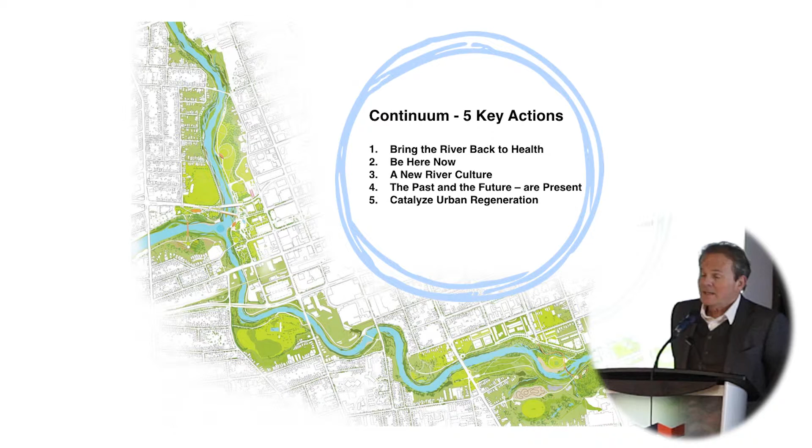The continuum is founded on five key actions. Bring the river back to health restores the river's sustainability and ecology. Be Here Now captures the myriad of activities that will bring Londoners back to the river. A new river culture advocates for an emerging generation of river stewards through participation, education, and culture.

The past and the future are present. This is the last line from Joseph Boyden's Orenda. For us, it asks the question: can the deep history of the river valley be better revealed through indigenous placemaking? We believe it can.

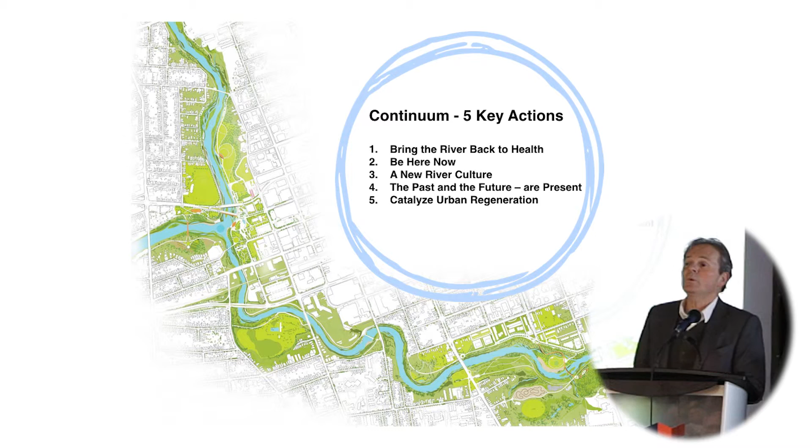The fifth action, catalyzing urban regeneration, provides a strategy that pairs river improvements with urban redevelopment to leverage funding for these initiatives from other levels of government and the private sector.

So now to begin, reviving the river's health will bring us back to the river. A series of environmentally restorative measures are proposed to revitalize the watercourse and the valley lands.

Today, the river channel is overly wide and shallow given the volume and speed of water moving through it. These are not healthy river conditions. By strategically narrowing the river, it will move faster with deeper pools, creating better conditions for sediment transport and the creation of healthy habitats.

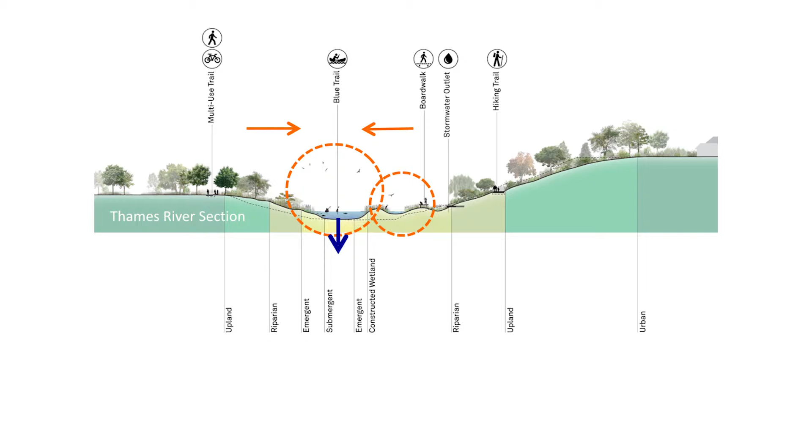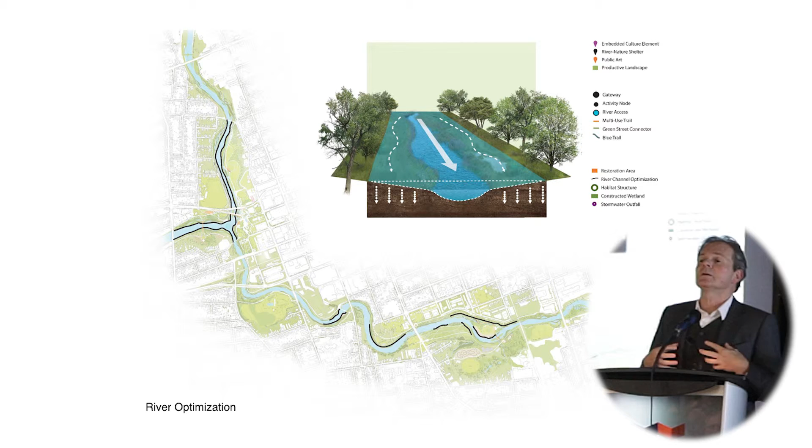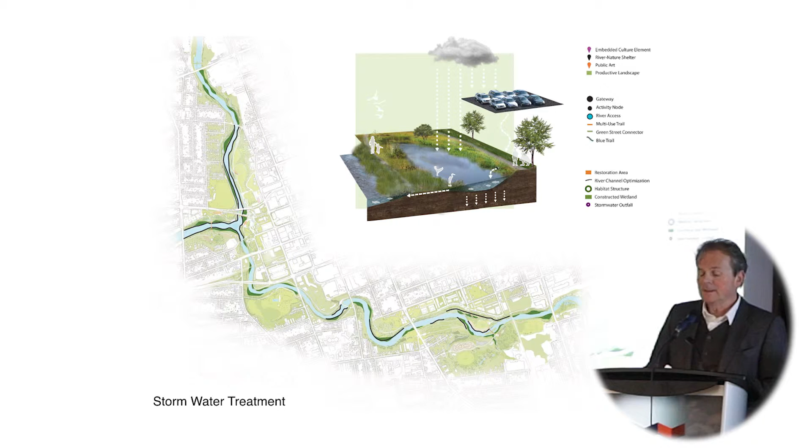By shifting the riverbanks inward, wider areas containing wetlands, parallel water channels, and new trails can be created on both sides of the river. Constructed wetlands are located at stormwater outfalls coming from the surrounding urban area, naturally filtering and cleansing the water before it enters the river.

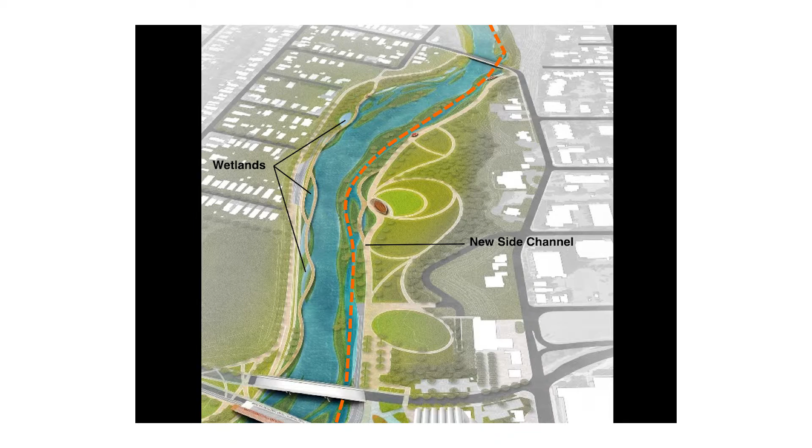Side channels and wetlands line the reconstructed riverbanks, creating space for new river activities, including winter skating.

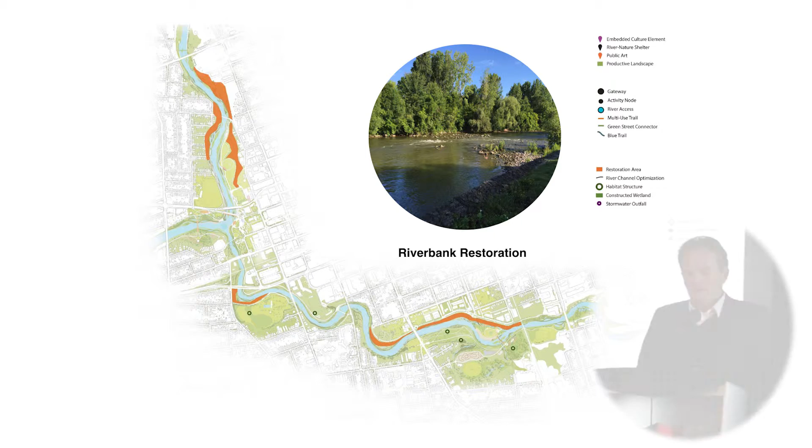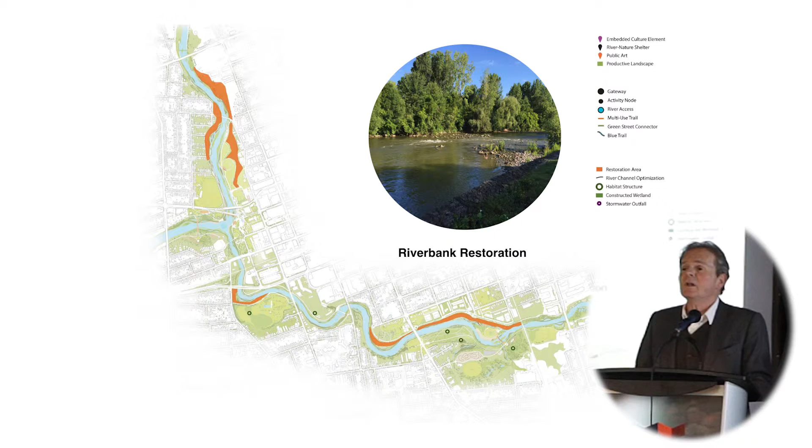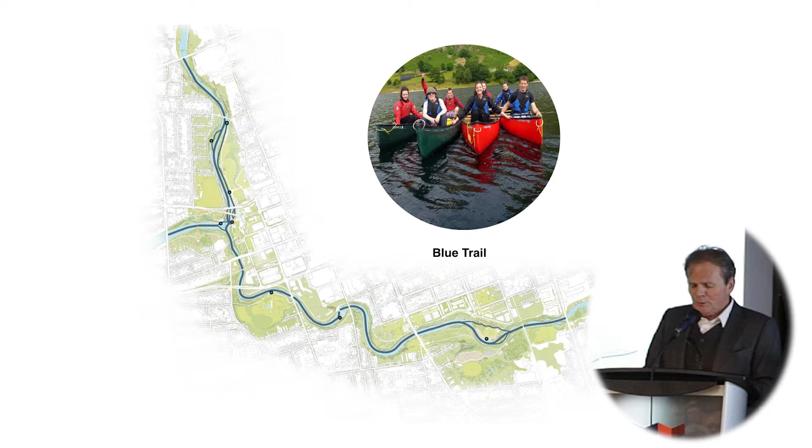Areas of degradation through the valley are restored through regrading and replanting, improving terrestrial habitat while consolidating green corridors for wildlife. A blue trail for boating spans the river, connecting to a series of launch points which also serve as interpretive sites. An enhanced green trail system provides a continuous circuit for hiking and jogging.

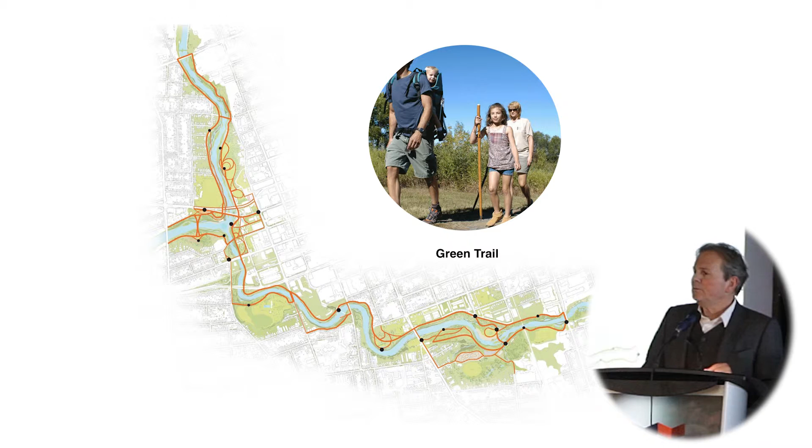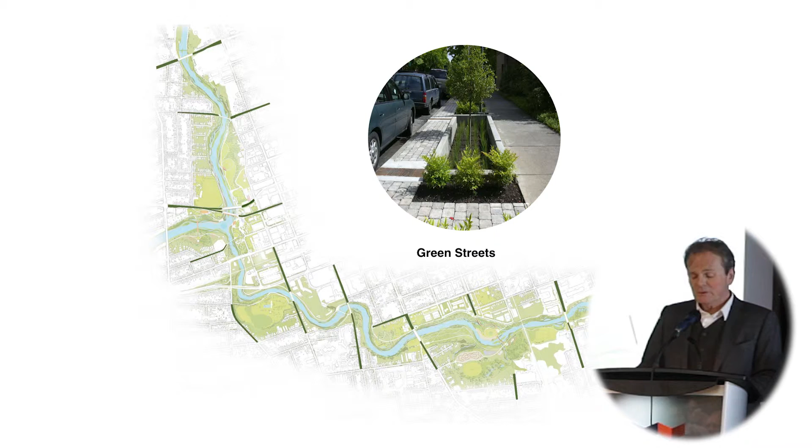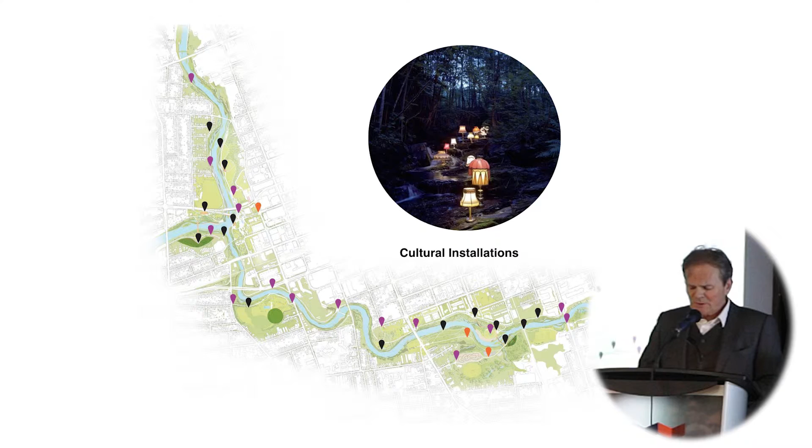Green streets and gateways provide a unique, sustainably branded design that draws people in the surrounding neighborhoods to the river, and a network of shelters and installations accommodate exercise stations, interpretive signage, public art, and educational installations.

We are proposing a sequence of 15 river nature shelters, placed along the river pathway network, accommodating a new program of outdoor education for kids and all those who will become the stewards of the river. These shelters also provide seating, shade, and other public amenities.

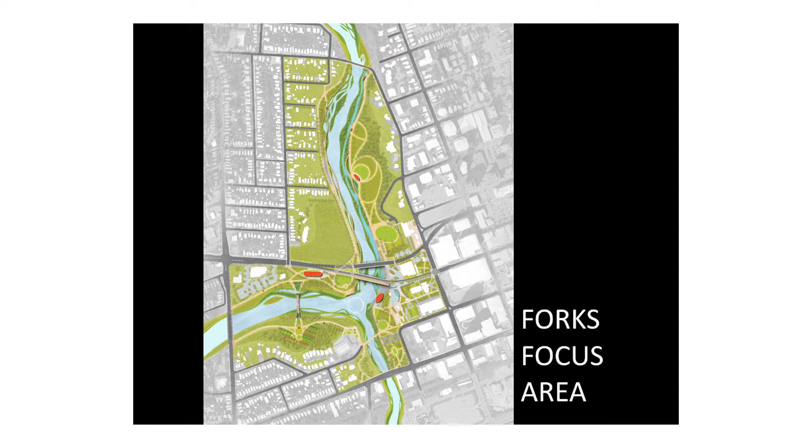So, moving now to the first focus area. At the heart of the Forks, a new circuit path is proposed as a continuous pedestrian loop linking the three banks of the river to a series of destinations and activities.

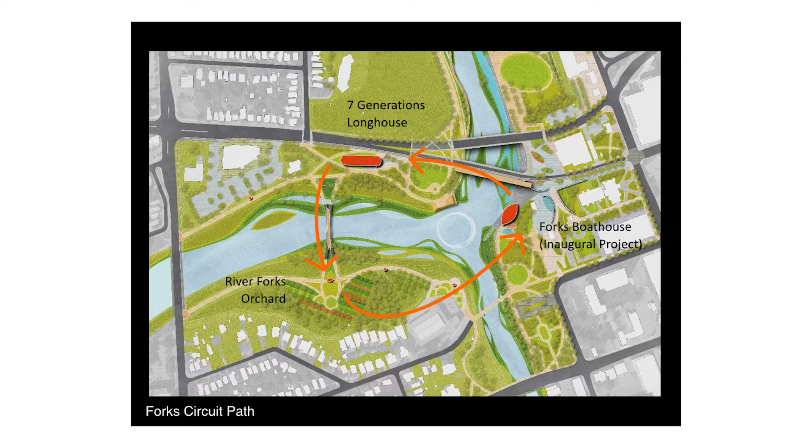The circuit is achieved through new bridge infrastructure, including a cantilevered pedestrian promenade on the Kensington Bridge and a new suspension bridge we call the Antler Bridge.

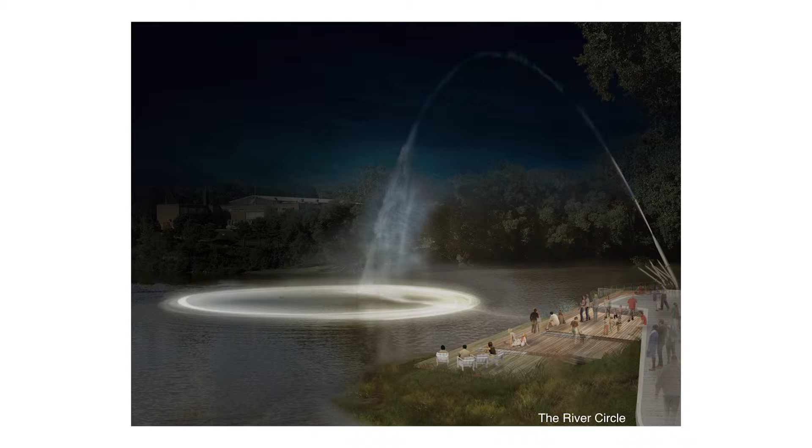At the epicenter of this circuit, marking the confluence of the merging watercourse, the river circle is the visual and symbolic anchor of the Forks. This circle is created by placing aeration loops on the riverbed, which oxygenate the water. Air bubbles rise to the surface in shifting patterns that glow during the day and night.

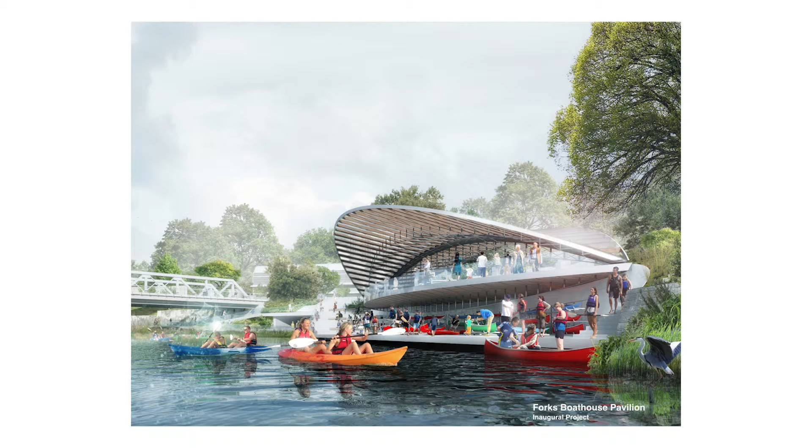And now I will hand it over to John to present the Forks inaugural project. Thank you, Cal. The Boathouse Pavilion draws the public back to the river by creating a multi-purpose venue for gathering and relaxation, for performance and learning, for events, and for embarking on river adventures.

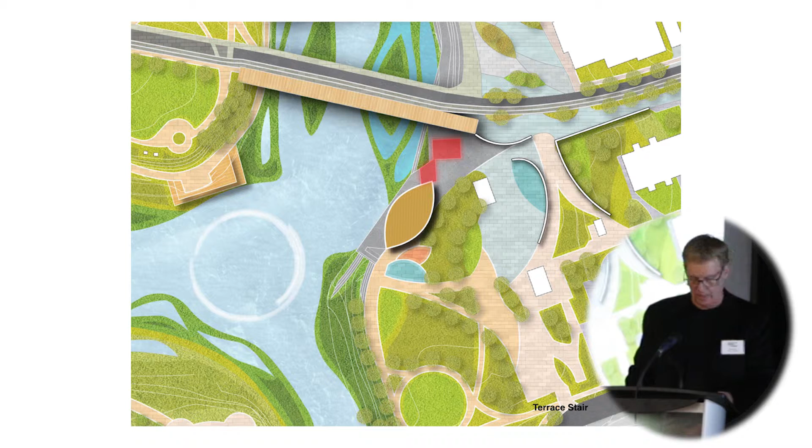Three main components of the boathouse anchor Dundas Street, reconnecting and reinvigorating the river's edge with a new public amenity: the terrace stair is the first, the floating boat deck is the second, and the overlook pavilion is the third.

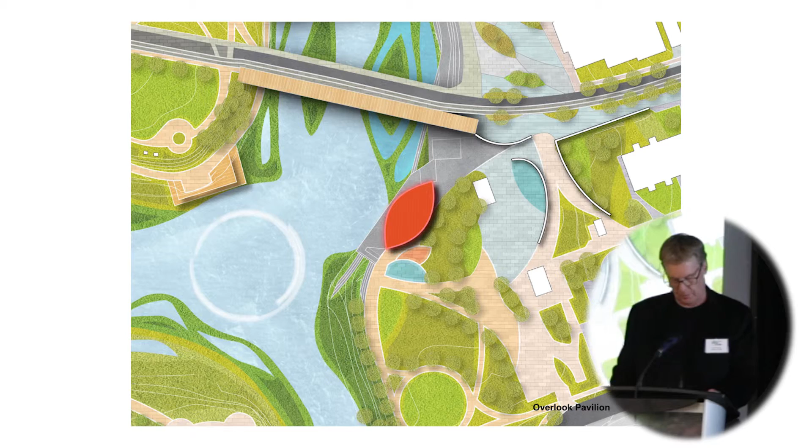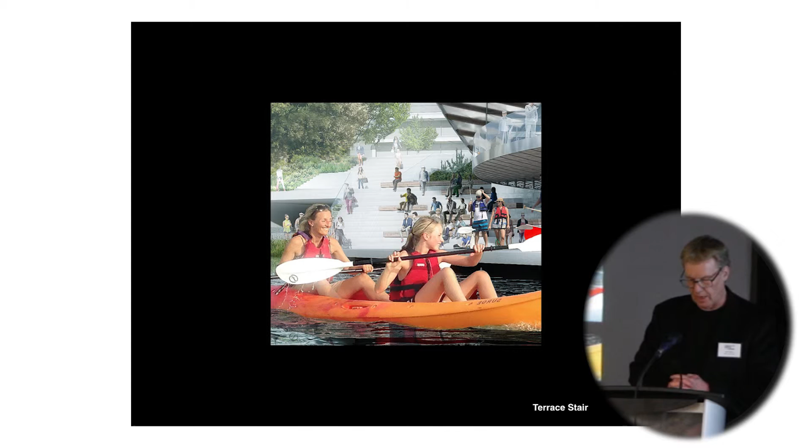The terrace stair connects Dundas Street to the floating boat deck and is a natural place for education and instruction. During lunch hour and weekends, it can become a new social hub along the water, drawing the public from street level down. It is also a natural place, day or night, for hosting performance and entertainment events.

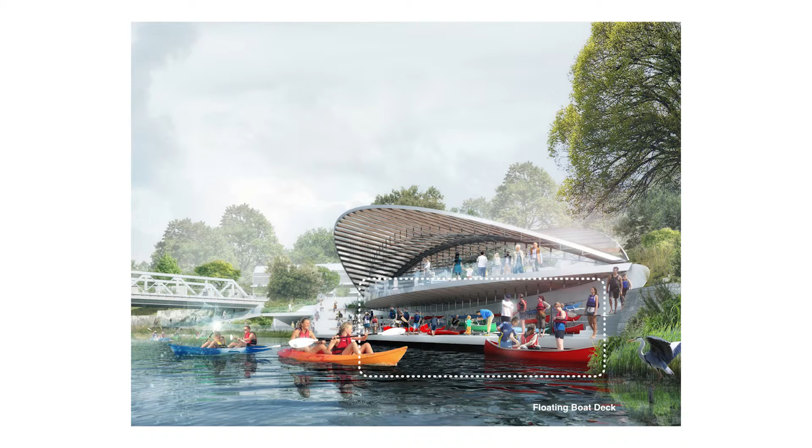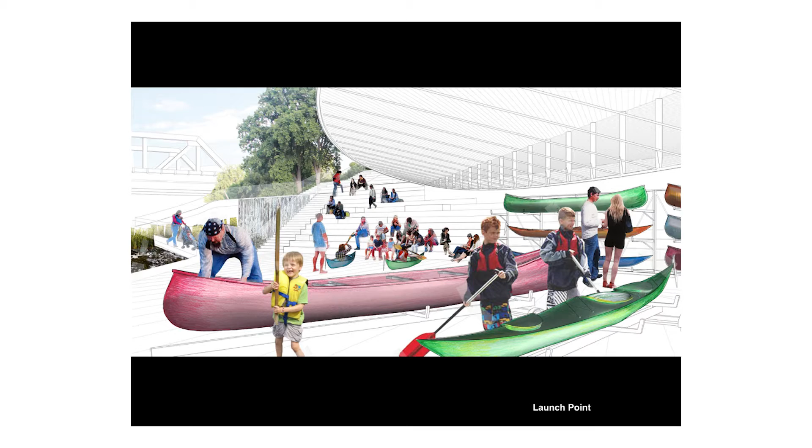The floating boat deck, sheltered by a robust concrete or cross-laminated timber slab and cable truss system, provides a launch point for river access, a venue for demonstration of boating techniques and water safety, alongside talks about the historical and ecological heritage of the Thames River. It is also a place where the public can rent a variety of small craft and head out onto the river for a day of active fun or relaxation.

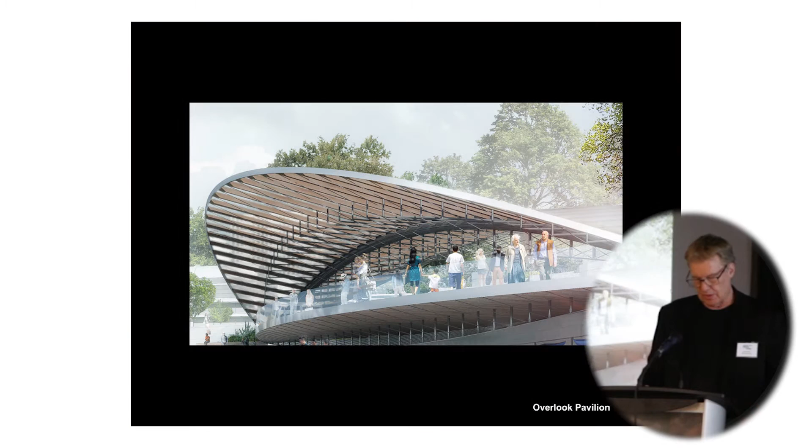The Overlook Pavilion, constructed of a filigree of wood, steel, and glass, creates a shaded place for large groups—perhaps not as large as the Table for 1200 fundraiser in Winnipeg, but a wonderful place for many events, including a bustling venue for weekend craft markets, or a quiet place for contemplation.

Moving from the boathouse, one now crosses the Kensington Bridge via the expanded promenade deck that provides space for overlook and can be programmed for special festivals and events.

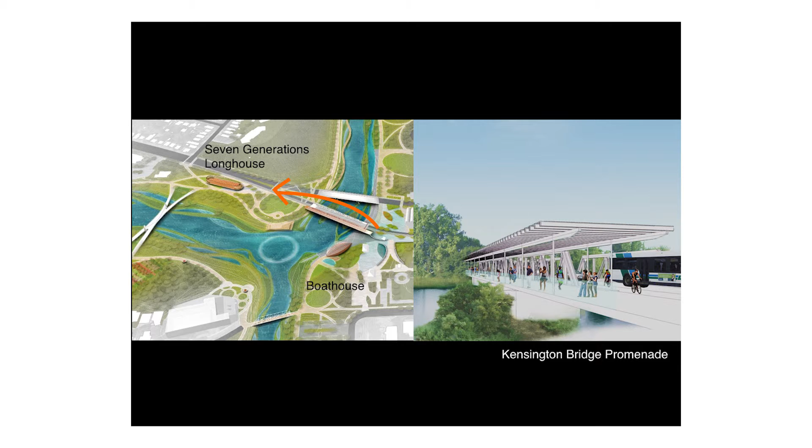The bridge metaphorically links London's multiple histories and cultures, leading us to the 7 Generations Longhouse.

There is little in the physical fabric of London that reveals the presence of the ancient First Nation cultures that have settled on the riverbanks for millennia. The 7 Generations Longhouse is one first step to address this missing link using ancient bentwood fabrication techniques. This outdoor pavilion will be a space for learning and vibrant cultural events. There is momentum in this time and era for reconciliation on both environmental and cultural levels.

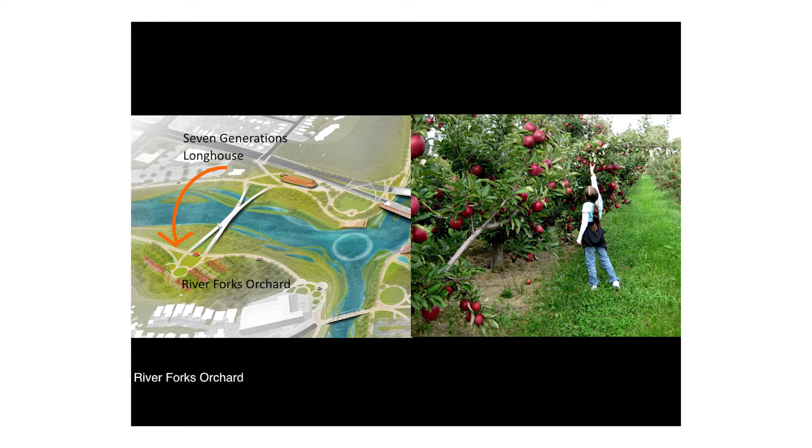Across the Antler Bridge, a new orchard builds upon the existing community garden at River Forks Park, expanding the river's role as a place of urban agriculture.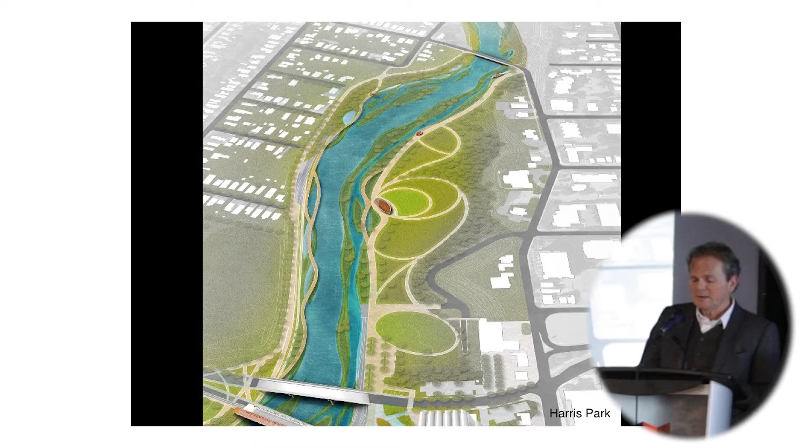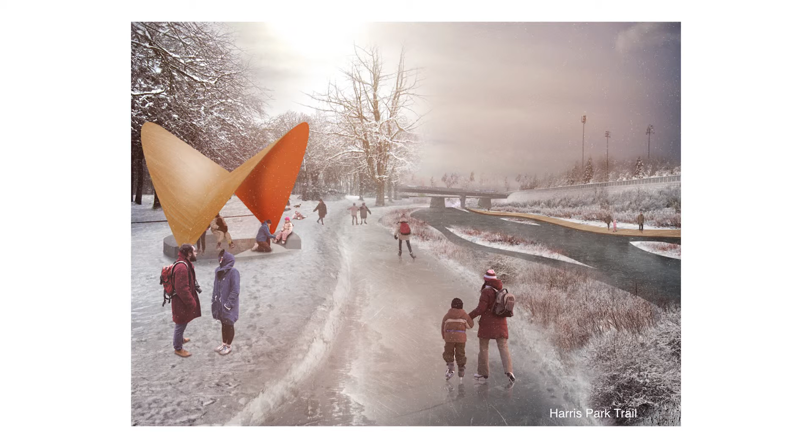To the north, Harris Park is revitalized through river restoration with new wetlands, channels, and native planting. Its role as a space for recreation, music, and cultural festivals will be strengthened. The land is sculpted to provide a natural amphitheater with a new band shell positioned to face both the amphitheater and the river. In the evening, a program of curated public art is projected onto the retaining wall on the west side. Harris Park will become a revitalized community destination year-round.

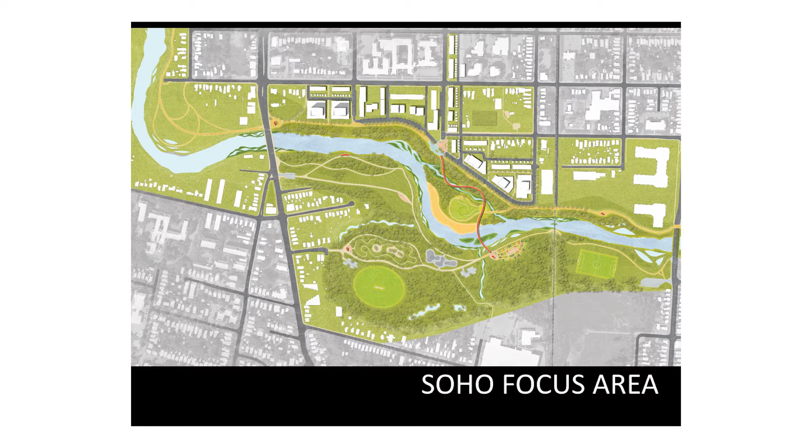Now on to Soho. The vision for the Soho focus area provides an exciting range of activities aimed to draw people from the surrounding neighborhoods to the valley on a daily basis. John will introduce you to the Soho neighborhood inaugural project.

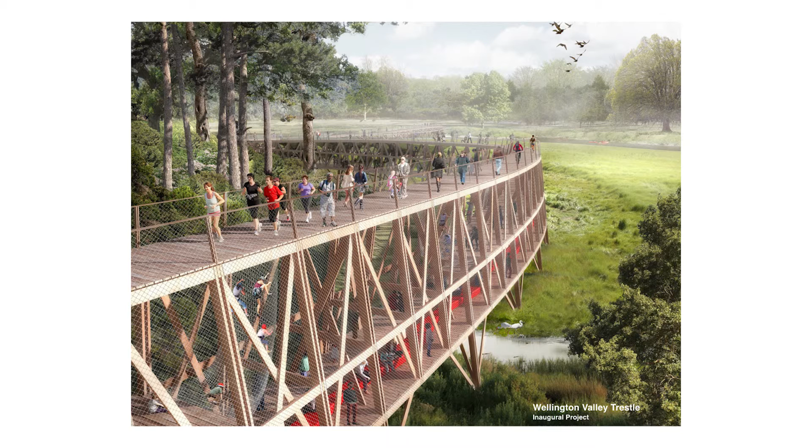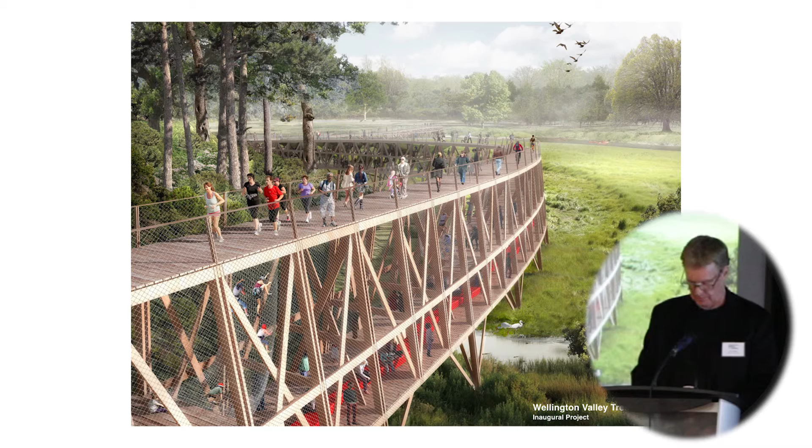The Wellington Valley Trestle weaves together the urban and the wild by connecting the Soho neighborhood to the forest embankment and the wetland floodplain below, with a gently sloping elevated pedestrian walkway that is also an armature for a variety of public spaces and events. Inspired by the robust wooden trestle bridges of our railroad history, the trestle navigates steep and impassable terrain.

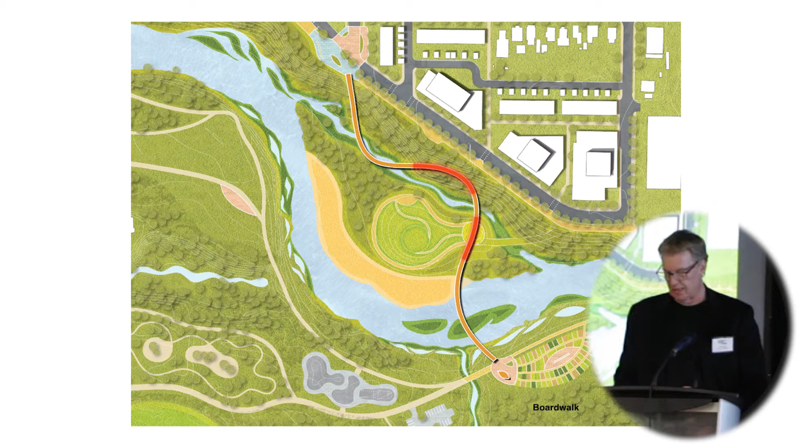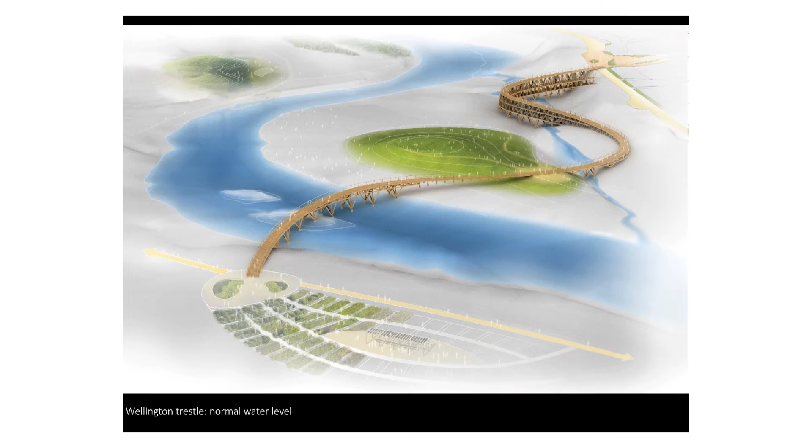Where possible, the trestle touches down on the river valley as an undulating, elevated pedestrian boardwalk. This range in scale provides a variety of advantages, from the panoramic to the personal. The trestle is designed to function in normal conditions, and it also functions during periodic flood events.

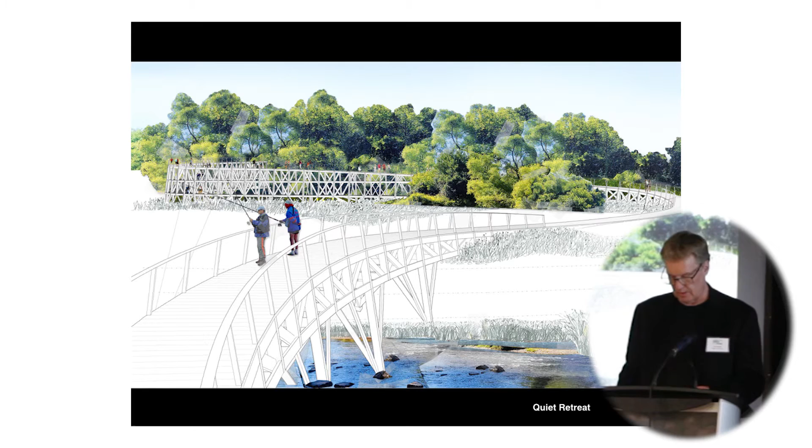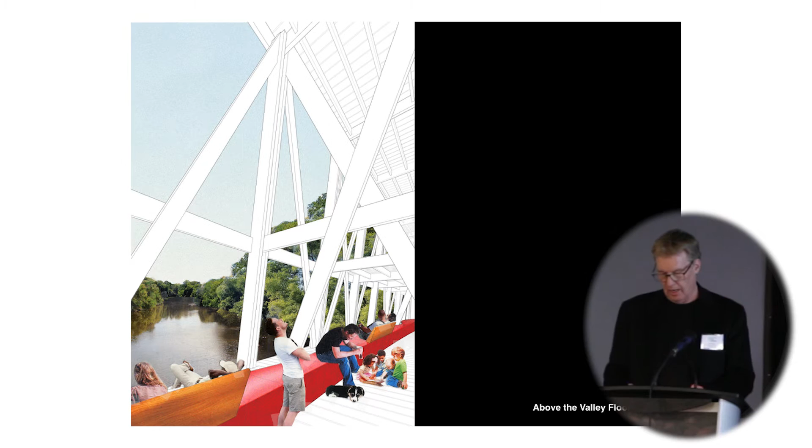The gently sloping trestle deck acts as a sinuous circulation route and view platform, accessible to all, from athletes to families with strollers. But it can also provide a quiet retreat not far from the bustle of city life. A public porch is housed within the trestle structure, providing the public with a large gathering area to socialize and relax, a new outdoor room suspended above the valley floor.

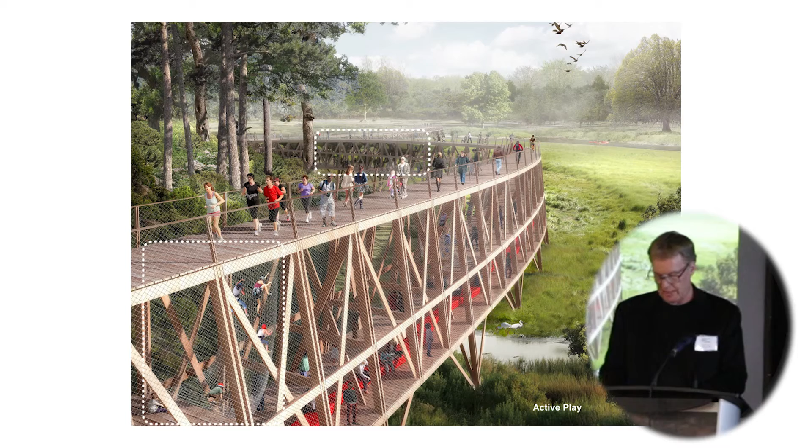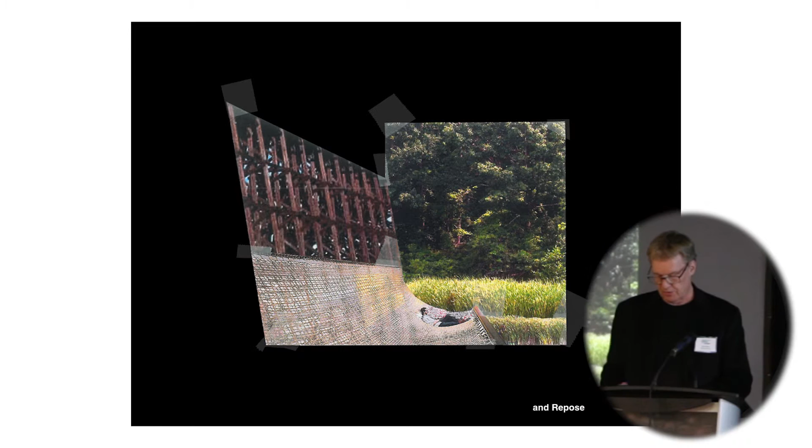The trestle also provides an opportunity to play, with active zones for rappelling, zones spanned by durable climbing nets. These nets are inspired by the art piece Nets by Numen, and also areas for repose. Pathway, viewing platform, public porch, outdoor room, active play structure, and place of repose.

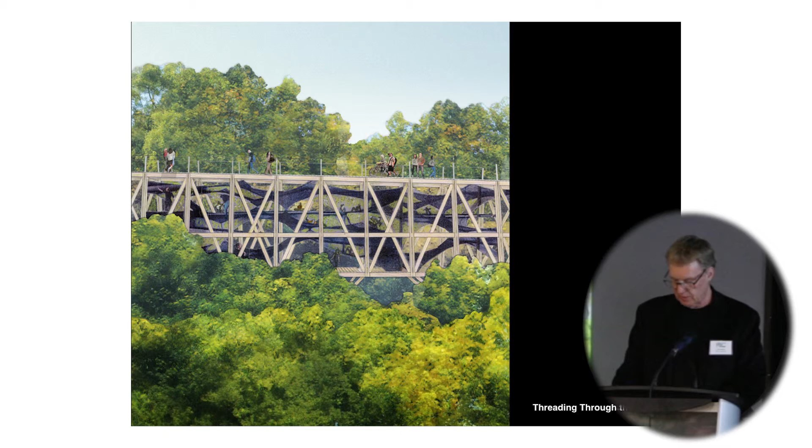The Wellington Valley Trestle is a thread that connects the Soho neighborhood to and through the river valley below.

Get all this stuff out of your way.

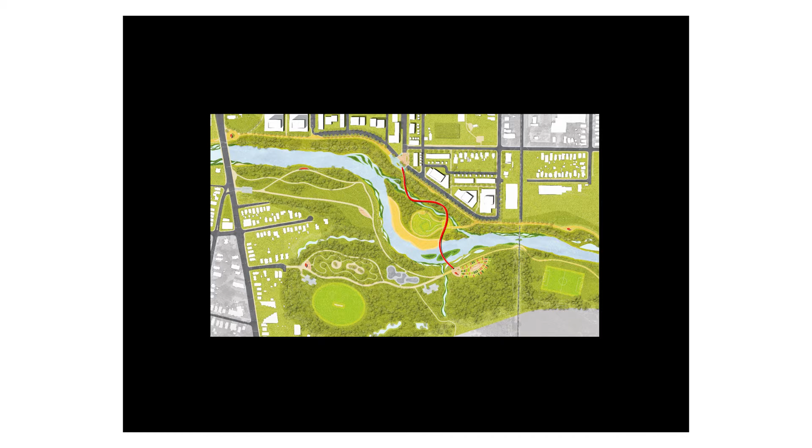The Wellington Valley Trestle is a sinuous spine that links the city to the river and the surrounding neighborhoods to an eclectic array of activities that bring us back to the river. The trestle connects to a pathway system on both the north and south banks, linking multiple activity areas.

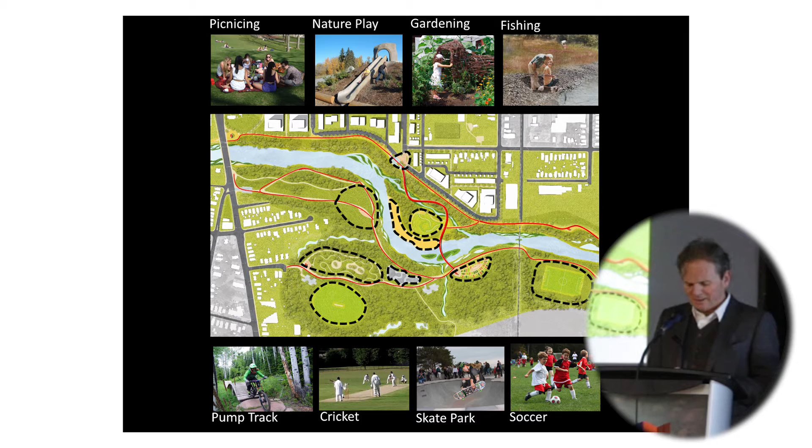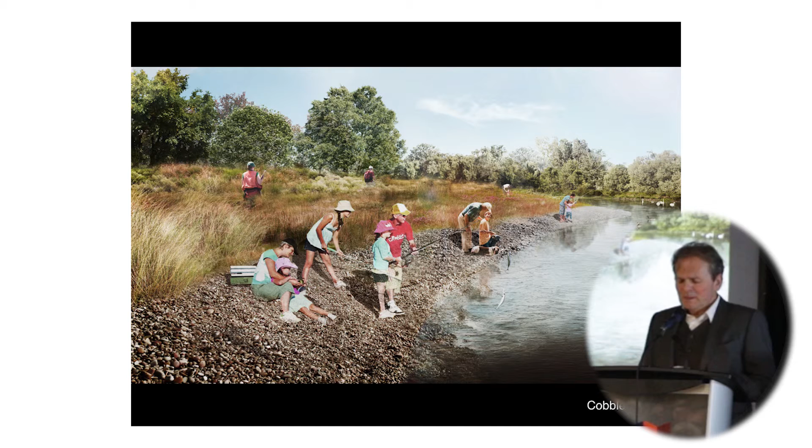On the north bank, a new channel flows through the Wellington Heath at the base of the steep embankment. Two key activity areas include the Nature Adventure Playground, located centrally in this naturalized landscape, inviting exploration and discovery, and the Wellington Heath Cobble Beach, bringing families to the river's edge for fishing and picnicking.

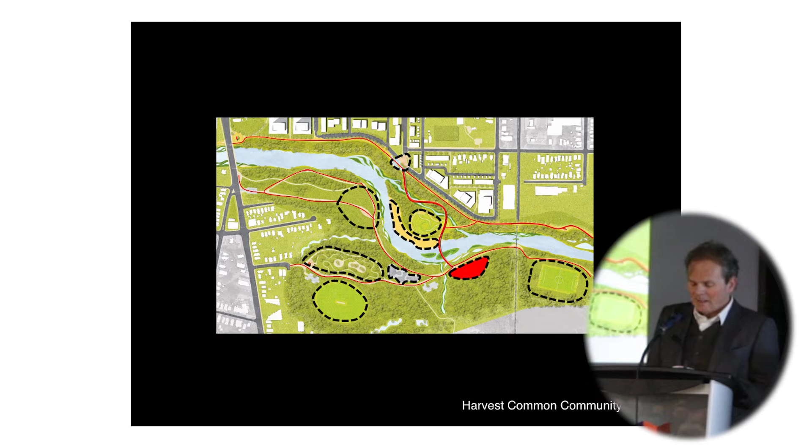Crossing the river now, at the south end of the trestle, a neighborhood base for community gardening is created at the Harvest Common, a place of gathering that reaffirms the river's role in local food production.

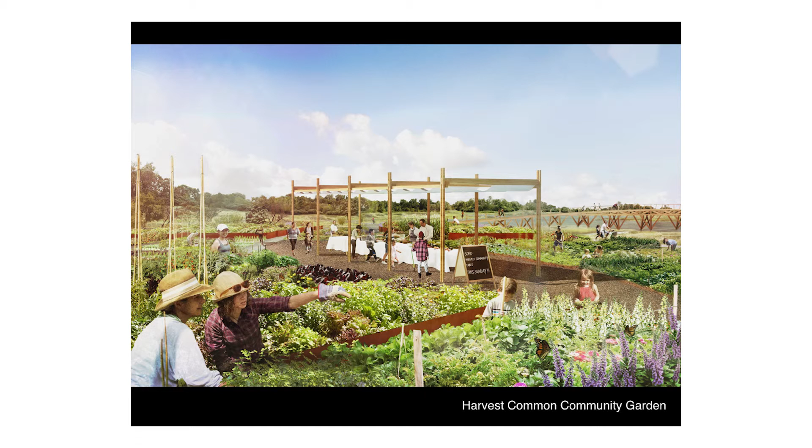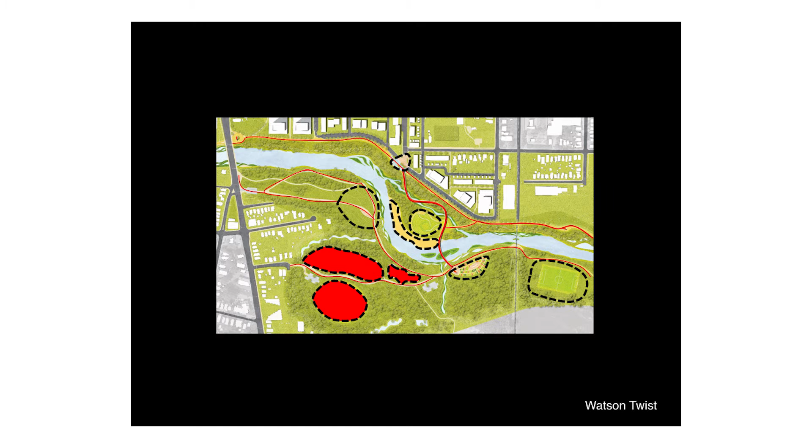Further along the trail, improvements and reprogramming of Watson Park focus on providing youth with an exhilarating series of activities. This eclectic vision we call the Watson Twist, with a BMX pump track course and skateboard park mixed inconceivably with cricket.

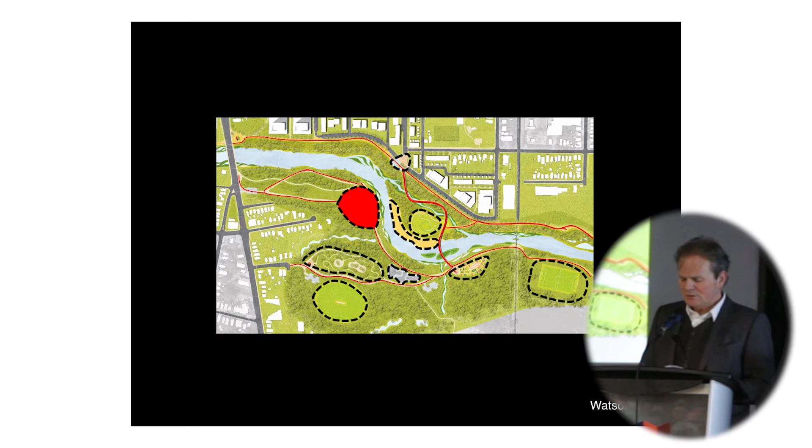On the south bank of the river, the Watson Bowl is central to a more serene and passive experience, where kayakers, canoeists, and hikers will be immersed in a beautiful natural landscape.

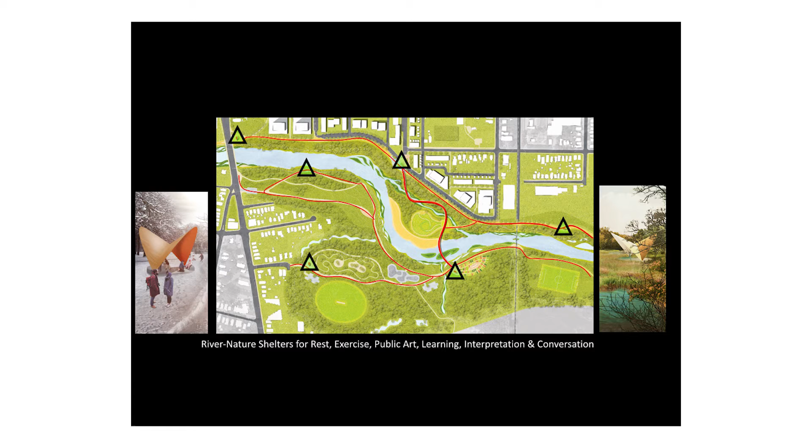Modulating this network of trails and events, 6 of the 15 river nature shelters are located within the Soho focus area. They serve as gateways, places for meeting, for resting, for learning, and conversation. As these gateways touch the surrounding neighborhoods, they can become places of interest, hosting a program of curated public art.

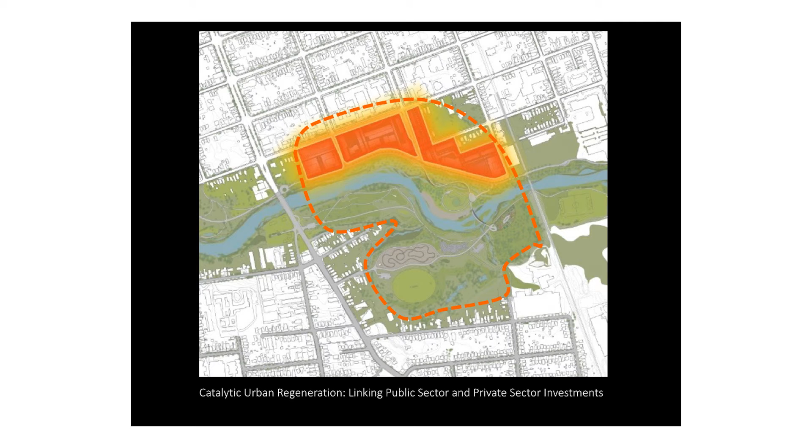Soho provides a perfect example of how the city's investment in the river can trigger urban regeneration by linking river improvement areas with adjacent urban sites. A strategy of public-private investment can be established, increasing the city's tax base and leveraging funding from other levels of government for river valley revitalization.

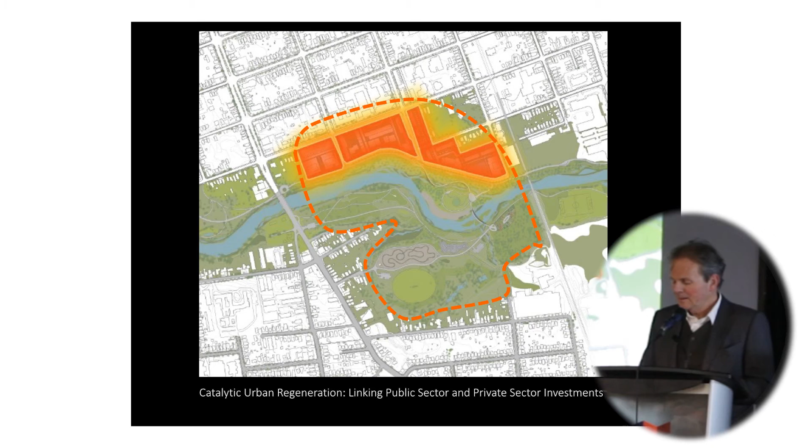This strategy is amplified to capture the entire Back to the River corridor, incorporating 5 regeneration precincts. Collectively, these sites represent 21 hectares of urban land that can result in millions of square meters of mixed-use development, triggered by the incredible quality of life that the river will present.

These numbers represent the type of catalytic effect experienced by other Canadian cities as a result of public sector investments in waterfront. The direct and indirect economic impacts far outweigh the cost to build, maintain, and operate these revitalized river lands, underscoring both the financial viability of the project and its soundness as a strategic public investment.

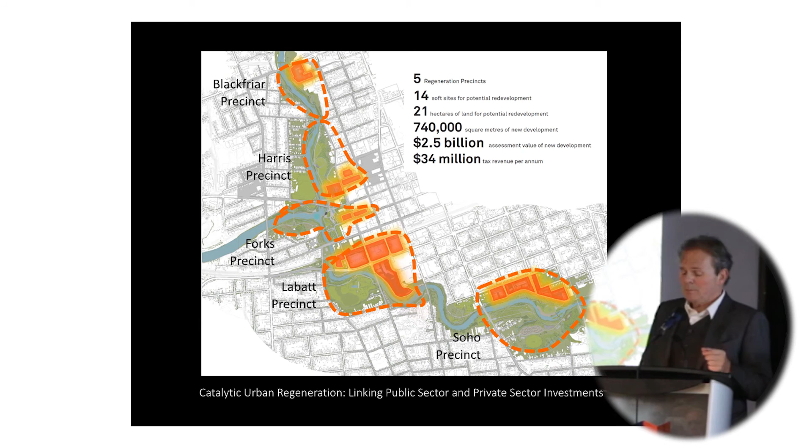In conclusion, a revitalized, sustainable river valley that brings Londoners back to the Thames is great economics, but it's also good for the soul of this community. These initiatives will ignite a pride of place whose value is hard to quantify, but cannot be underestimated.

These qualities will draw residents and visitors to London, but they are the moments of grace in the city that become the hallmarks of a progressive quality of life. It is these qualities that convince young Londoners to stay and build their futures in the community they were born and raised in, thus sustaining the continuum.